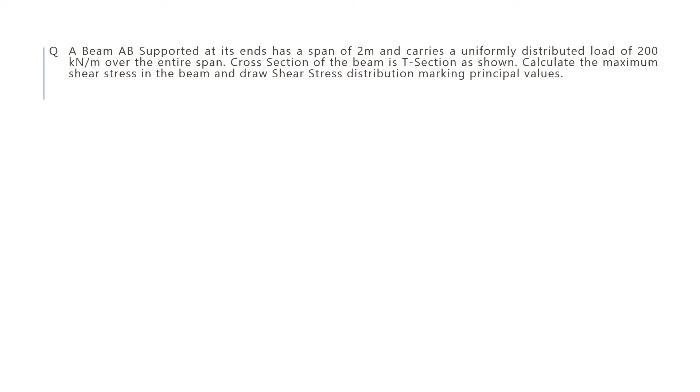So हमारे पास में एक बीम है जो दोनों ही एंड्स पे सिंपली सपोर्टेड है। इसकी लेंथ है 2 मीटर एंड इट इज कैरिंग यूडीएल ऑफ 200 किलोन्यूटन पर मीटर ओवर द एंटायर स्पेन। टी क्रॉस सेक्शन है, हमें मैक्सिमम शियर स्ट्रेस बीम में फाइंड आउट करना है और साथ ही साथ वी हैव टू ड्रॉ द शियर स्ट्रेस डिस्ट्रीब्यूशन विद द प्रिंसिपल वैल्यूज।

So this is the cross section given to us with all the dimensions of the cross section. Now, since the beam is simply supported and carrying uniformly distributed load, it means the figure is something like this. This gray colored beam is shown to us with the red colored UDL, simply supported at the ends, and इसका हमने shear force and bending moment diagram draw किया है.

So here from this shear force diagram it is clearly visible that the maximum shear force will be WL by 2 and it will be at its ends। तो ये शेयर फोर्स की वैल्यू हमने शेयर फोर्स डायग्राम से फाइंड आउट की है।

बट इफ यू आर नॉट कंफर्टेबल कि ये शेयर फोर्स डायग्राम कैसे बनाया, ये वैल्यू हमने कैसे फाइंड आउट की, देन आई विल रिक्वेस्ट यू टू प्लीज गो टू माय वीडियोस ऑफ शेयर फोर्स एंड बेंडिंग मोमेंट डायग्राम, जहां पर मैंने शेयर फोर्स और बेंडिंग मोमेंट डायग्राम के डिफरेंट केसेस को स्टडी करते हुए आपको ये समझाया है कि शेयर फोर्स और बेंडिंग मोमेंट डायग्राम कैसे बनते हैं, कैसे शेयर फोर्स की वैल्यू फाइंड आउट होती है, कैसे बेंडिंग मोमेंट की वैल्यूज फाइंड आउट होती है।

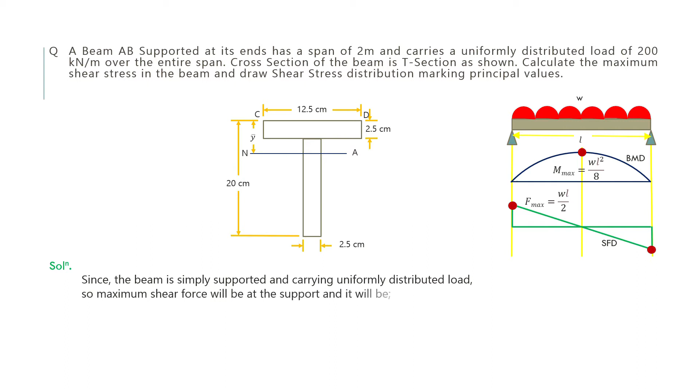सो यू कैन रेफर टू माय वीडियोस एंड यू कैन अंडरस्टैंड दिस थिंग, बट यहां पर मैं सिर्फ इस वैल्यू को यूज करूंगा, that maximum shear force value is WL by 2. So the maximum shear force will be at the support and it will be WL by 2, where W is the uniformly distributed load and L is the length of the beam.

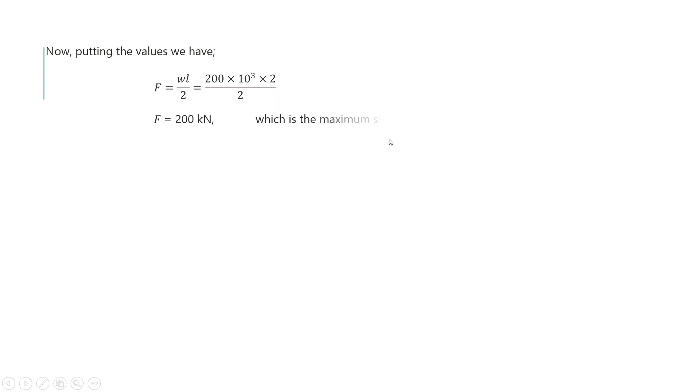Now putting the values, we will get force equal to WL by 2 means 200 into 10 to the power of 3 into 2 by 2. So finally we will get shear force equal to 200 kilonewton, and this shear force is the maximum shear force at the section of the beam.

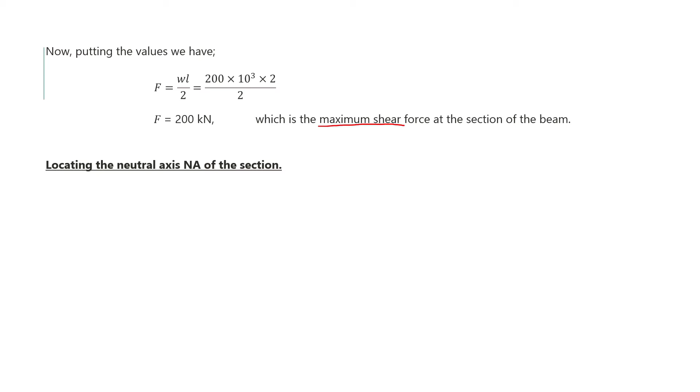Now we will locate the neutral axis of the cross section. So for that, let us consider or let us assume that this neutral axis is lying at a distance of y bar from the topmost fiber CD. हम ये मान के चलते हैं कि neutral axis topmost fiber CD से y bar distance पर lie करता है।

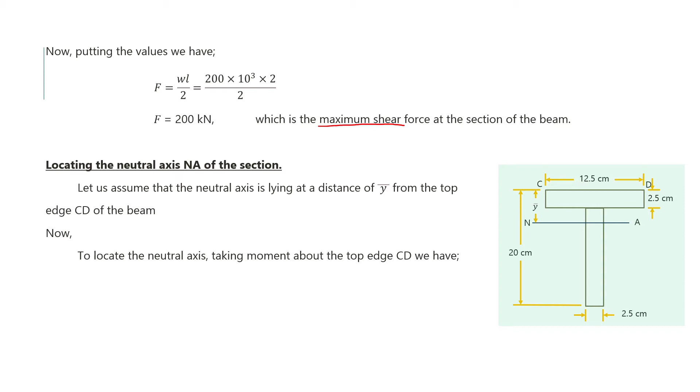So then to locate the neutral axis, I will take the moment about the top edge CD. So taking the moment, it will be 12.5 into 2.5. This is the area of the flange where the width is 12.5 and height is 2.5. So this 12.5 into 2.5 is the area of the flange plus 2.5 into 17.5 means from here to here. This is the height of the web.

This is 20 minus 2.5 means 17.5 centimeters. So this 2.5 into 17.5, this is the area of the web. So this is the total area of the cross section multiplied by y bar, which is the distance of neutral axis from the topmost fiber CD.

Now this will be equal to the area of the flange 12.5 into 2.5. This is the area of the flange into the distance of its centroidal axis from the topmost fiber CD. तो centroidal axis flange का कैसा होगा? It will be something like this.

It will lie at the mid of the height. So this distance from the topmost fiber CD will be equal to 2.5 by 2, which means 1.25 centimeters.

Now similarly for the web, the cross section is 2.5 centimeters into 17.5 centimeters. This height is 17.5.

So the area is 2.5 into 17.5 centimeters into the distance of its centroidal axis from the topmost fiber CD. This centroidal axis, from here to here, obviously lies at the mid of the height of the web.

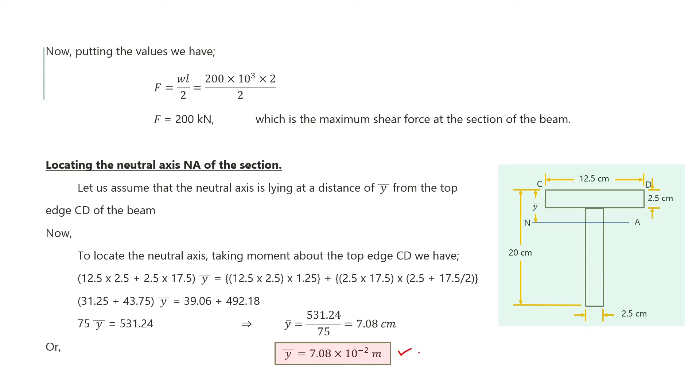Now we will take the moment of inertia of the cross section about the neutral axis we found. About this neutral axis, we will find out the moment of inertia of the cross sectional area. So this is our cross sectional area.

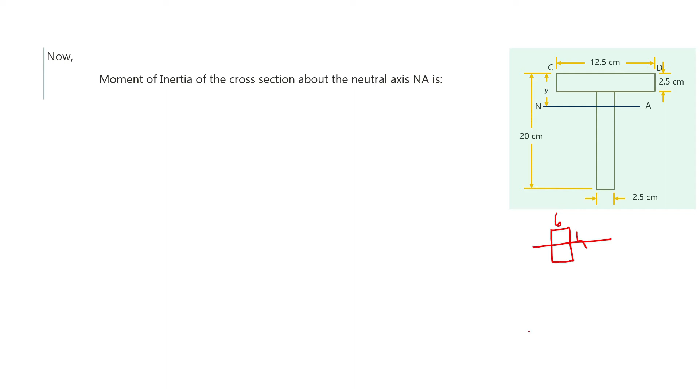Before moving ahead, I would like to remind you about the parallel axis theorem, which says we have a rectangle with width b and height h, and this is the centroidal axis of this rectangle. It says that the moment of inertia about its own centroidal axis will be bh cubed by 12.

But we have another axis, AB, which is parallel to the centroidal axis, and the distance between these two is x. Then as per the parallel axis theorem, the moment of inertia about axis AB will be...

...the moment of inertia about its own axis plus the area of the rectangle, that is BH, into the square of the distance between them. So this is the expression.

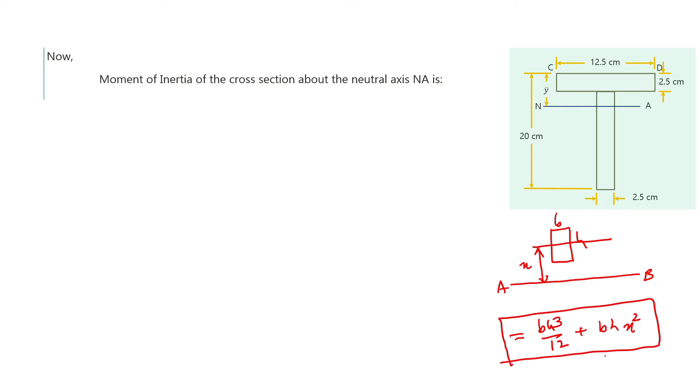We will use this expression for finding out the moment of inertia of the cross section about the neutral axis NA. So let's proceed. This will be equal to the moment of inertia for the flange.

Here B is 12.5 and H is 2.5, so it's 12.5 into 2.5 cubed by 12. This is the moment of inertia of the flange about its own axis, meaning about this centroidal axis.

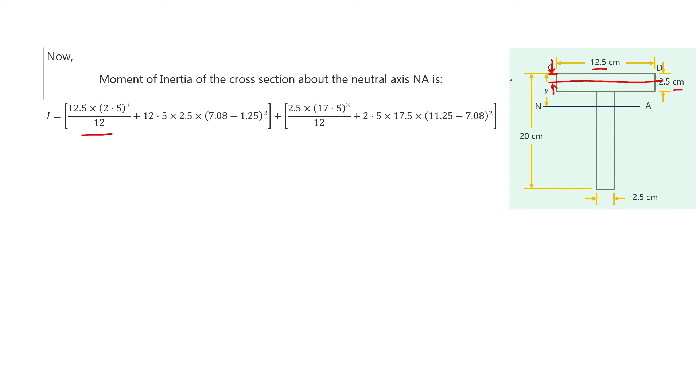The distance between the topmost point and the centroidal axis will be 2.5 by 2, meaning 1.25 centimeters. So the distance between the centroidal axis and the neutral axis will be y bar minus 1.25.

So this y bar means 7.08 minus 1.25 centimeters. We have put the values as per the parallel axis theorem.

Similarly for the web, B is 2.5 and H, meaning the height of the web, is 17.5 centimeters.

So B means 2.5 into 17.5 cubed by 12. This is the moment of inertia of the web about its own centroidal axis, meaning this axis.

This centroidal axis will lie at the mid of the 17.5. So the distance of this centroidal axis of the web from the topmost fiber CD will be 17.5 by 2 plus 2.5, which is equal to 11.25.

So obviously the distance between the neutral axis and the centroidal axis of this web will be equal to 11.25 minus y bar, that is 11.25 minus 7.08 centimeters.

Now solving it further, we will get that the moment of inertia will be equal to 2955.73 centimeters to the power 4, or if you want to convert it to meters to the power 4, then it will be multiplied by 10 to the power of minus 2 to the power 4.

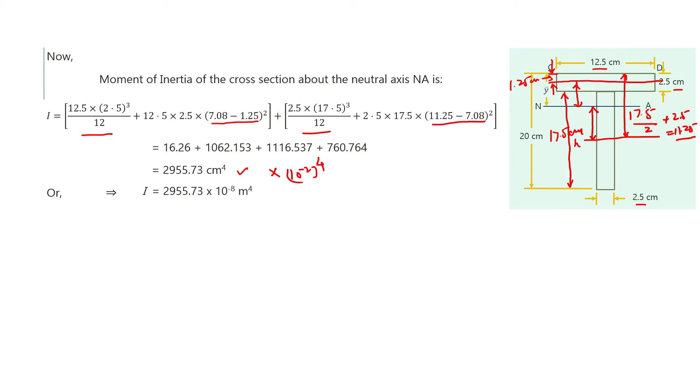So we get that the moment of inertia of the cross section about the neutral axis will be 2955.73 into 10 to the power of minus 8 meters to the power 4.

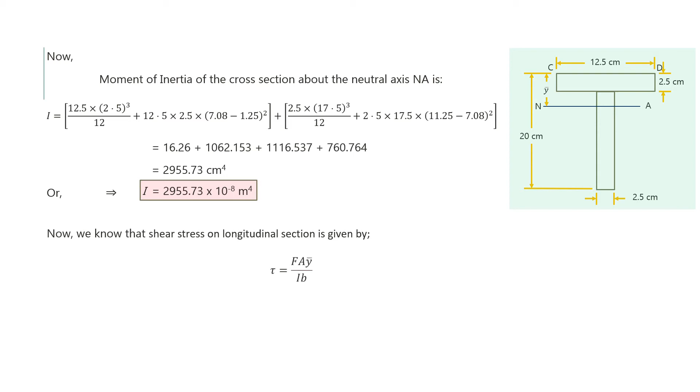Now we know that shear stress on a longitudinal section is given by tau equal to F A y bar by I B, where F is the shear force at the section, A is the area, B is the width of the area considered.

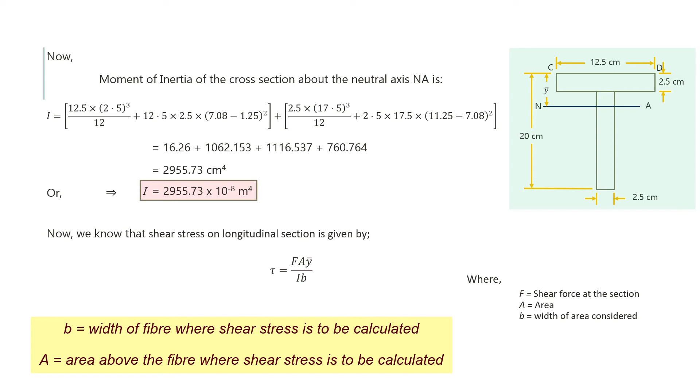And y bar is the distance of its centroidal axis from the neutral axis. We will use this expression to find out the shear stress on the longitudinal section at different points.

Let's proceed. Now, shear stress in the flange at the junction with the web. So this is our flange, this rectangular portion, and we have to find out the shear stress in this flange at the junction with the web, right here.

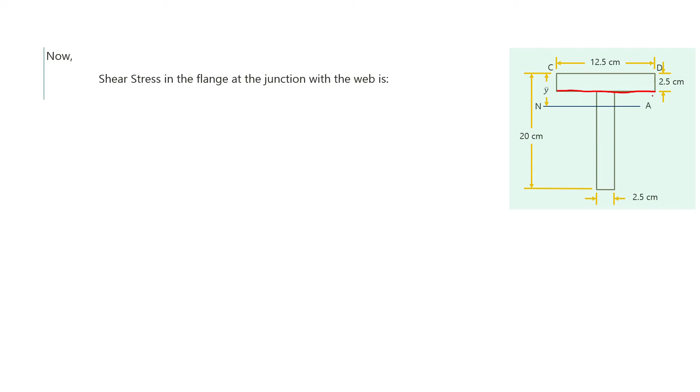So as per the formula, we will put the values. This is 200 into 10 to the power of 3, which is the shear force already given to us. Area of the flange is 12.5 centimeter into 2.5 centimeter. Converting to meters, we use 12.5 into 10 to the power minus 2 meter into 2.5 into 10 to the power minus 2 meter. So this is the area.

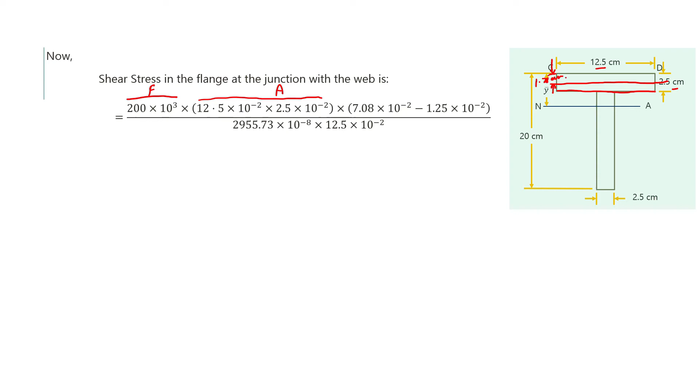Now the centroidal axis of this flange will be somewhere here, meaning from the top the distance is 1.25 centimeters. The distance of its centroidal axis from the neutral axis will be y bar minus 1.25. So this is 7.08 into 10 to the power minus 2 minus 1.25 into 10 to the power minus 2. This is y bar.

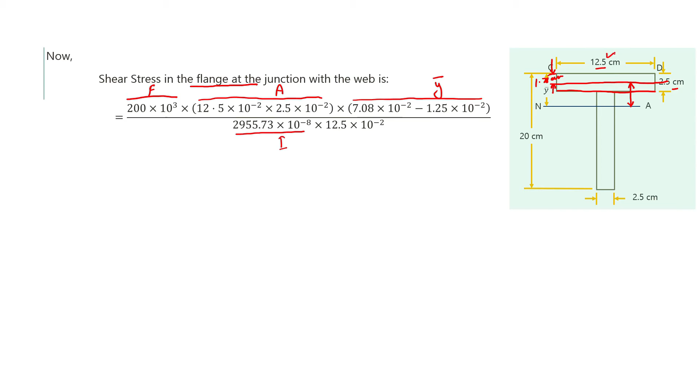Now divided by I, that moment of inertia we have already calculated, 2955.73 into 10 to the power minus 8. This is the moment of inertia, and B is the width. Width of what? Width of flange, because we are taking the shear stress in the flange at the junction with the web. So here the width of the flange will be taken, and its width is 12.5 centimeter, meaning 12.5 into 10 to the power minus 2 meter.

So this is width. Now solving it further, we get that shear stress in the flange at the junction with the web is 9.862 into 10 to the power of 6 Newton per meter square, or 9.862 megapascal.

Now we will find out the shear stress in the web at the junction with the flange, meaning here, which I'm marking with the red line.

So as per the formula, we will put the values. This is 200 into 10 to the power of 3, which is the shear force already given to us. Now area of the flange, that is 12.5 into 2.5, so 12.5 into 10 to the power minus 2 meter into 2.5 into 10 to the power minus 2 meter. So this is the area.

Now y bar is again the distance of the centroidal axis from the neutral axis. Similar to what we found above, this will be y bar minus 1.25. So this is again our y bar, and this is the moment of inertia I, and this is the width. Now the width is different. Here the width is 2.5 into 10 to the power minus 2 meter, because we are finding the shear stress in the web, so we consider the web thickness, which is 2.5 centimeters.

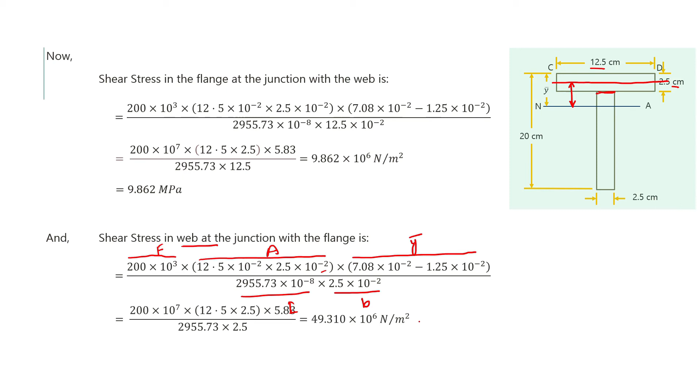So now solving it further, we get that shear stress is equal to 49.310 into 10 to the power of 6 Newton per meter square. Finally we can say that shear stress in the web at the junction with the flange is 49.310 megapascal.

Now we know that the shear stress will be maximum at the neutral axis, and its value will be F upon IB times A1 Y1 bar plus A2 Y2 bar.

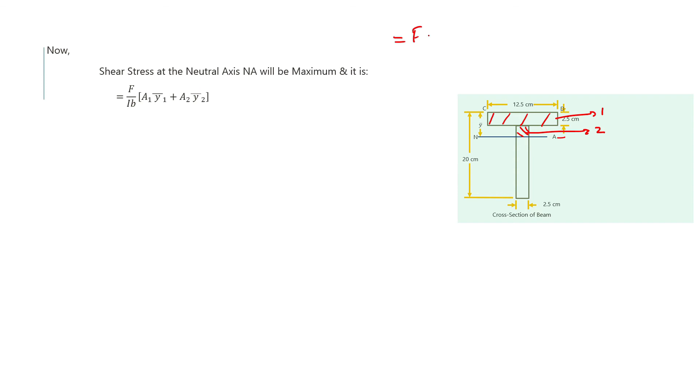Now here we see a slightly different equation. Actually we are finding the shear stress at the neutral axis at this point, so we have to take the area above it. Area above it means this is the flange, and this is the area of the web that we have to consider. So the flange area I am taking as 1, and this area I am taking as 2. So the shear stress formula says it will be equal to F A1 Y1 bar by IB for this flange portion plus F A2 Y2 bar by IB for this web portion.

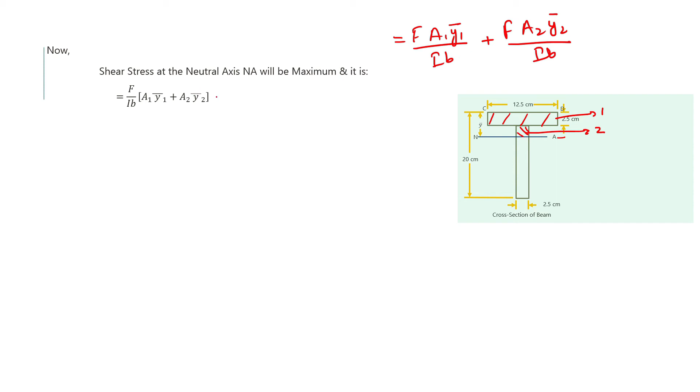So jointly I can write it like this. Now we will find out the values of A1 Y1 bar and A2 Y2 bar first. A1 Y1 bar will be equal to: 12.5 is the width of the flange, 2.5 is the height of the flange. So area of the flange is 12.5 into 10 to the power minus 2 meter into 2.5 into 10 to the power minus 2 meter. So this is the area.

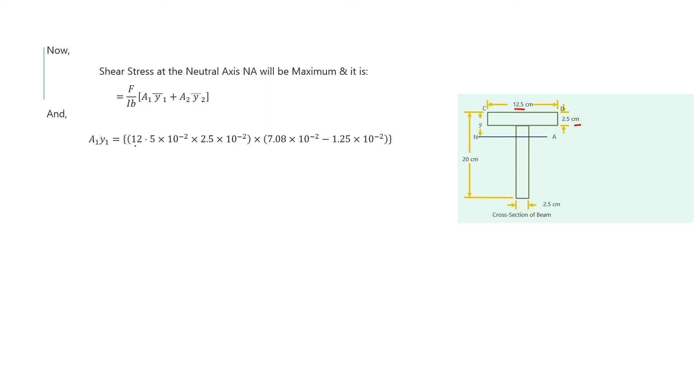And y bar is the distance of its centroidal axis from the neutral axis, which will be equal to y bar minus 1.25. So this is 7.08 into 10 to the power minus 2 minus 1.25 into 10 to the power minus 2 meters. So finally we get that A1 Y1 will be equal to 182.187 into 10 to the power minus 6. Similarly, find out the value of A2 Y2 bar, which will be equal to area of this web portion.

Here the width is 2.5, so this is 2.5 into 10 to the power minus 2. And height means this much of height.

So the neutral axis is lying at a distance of y bar from the topmost fiber CD, and this much of height will be y bar minus thickness of the flange. So this is 7.08 minus 2.5, which is equal to 4.58 centimeters. So this is the width and this is the thickness.

So this is the area of the second portion, that is the web portion. Now the distance of its centroidal axis from the neutral axis we have to find out. Its centroidal axis obviously will lie at the mid of 4.58, so its distance will be 4.58 by 2, that is equal to 2.29 centimeters. So the distance between its centroidal axis and neutral axis will be 2.29 centimeters.

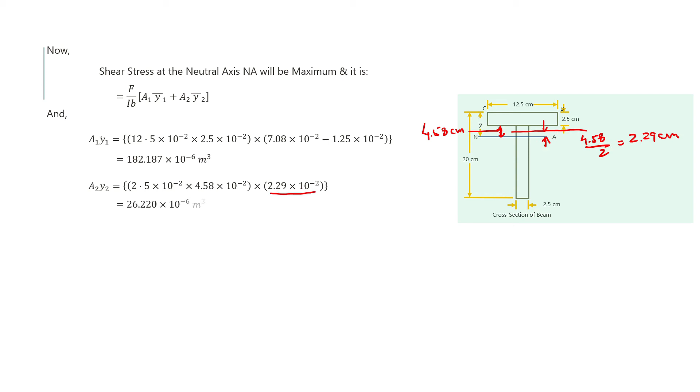So this is 2.29 into 10 to the power minus 2. Solving further, we get A2Y2 bar is equal to 26.220 into 10 to the power minus 6. So here this is A1Y1 bar and this is A2Y2 bar. Let me correct it. Now we will put these values in this formula and find out the answer.

So putting the values, F is 200 into 10 to the power 3. My I is 2955.73 into 10 to the power minus 8. And B is the width, that is 2.5 into 10 to the power minus 2, that is the width of the web. Because here we are finding the shear stress at the neutral axis, so at the neutral axis the width of the web is 2.5 centimeters. So we have taken this width as 2.5 centimeters, and A1Y1 bar and A2Y2 bar.

So finally we will solve it and we will get the value to be 56.407 into 10 to the power 6 Newton per meter square, or we can say this is 56.407 megapascals.

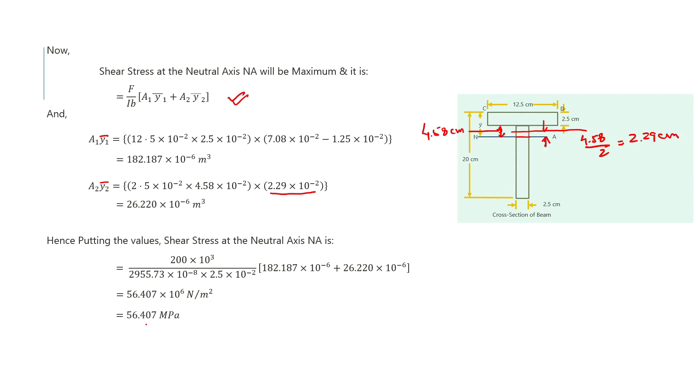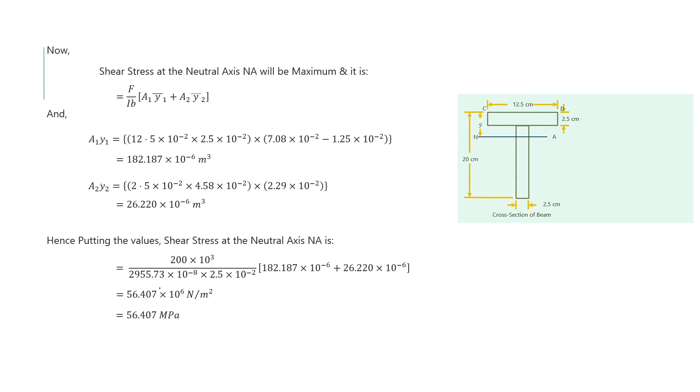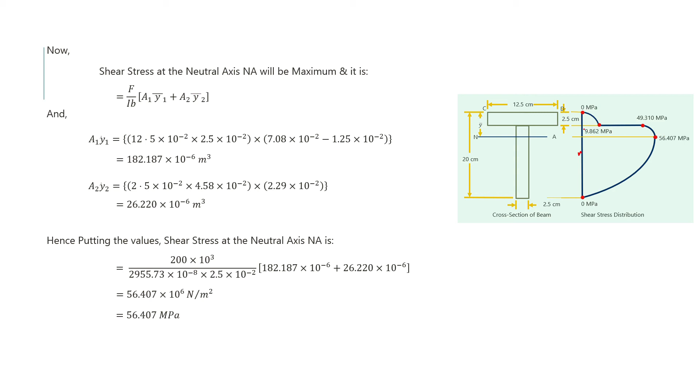Here we can see at the top fiber the stress is 0, at the bottom fiber also the stress is 0. At the neutral axis I marked a line, and I drew a vertical line first, for reference. So as per the value I am marking the points on these horizontal lines drawn accordingly from this diagram. Now at the top and bottom fiber, since the shear stress is 0, so this is 0 here.

Now shear stress in the flange at the junction with the web is 9.862, so I have marked it 9.862 with some scale. Shear stress in the web at the junction with the flange is 49.310, so this is 49.310, marked here.

At the neutral axis, this is 56.407, so I marked it here with some suitable scale. And now I have joined these points with a smooth curve to draw this shear stress distribution diagram. So this is the diagram of shear stress distribution.

So here we have also proved that shear stress is maximum at the neutral axis and 0 at the top and bottom fiber, meaning the value of shear stress will be maximum at the neutral axis and zero at the top and bottom fiber.